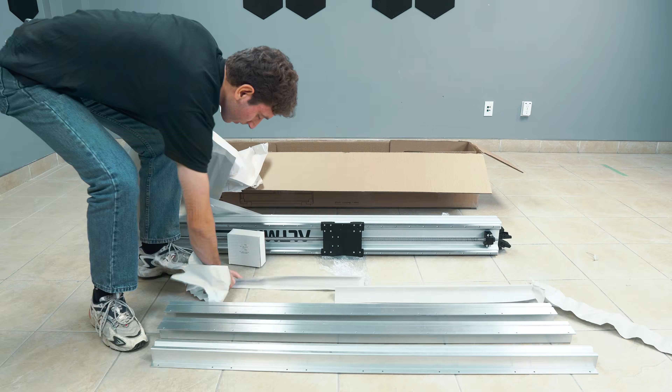Behind me is the AltMill, and I'm going to be walking you guys through the assembly process and giving you a couple tips and tricks along the way. Let's get to it.

Before we get started assembling, I want to talk you through some best practices. Due to the weight of several components, it is highly recommended that you assemble the AltMill with another person. The expected assembly time is between 5 and 8 hours. So make sure to allot ample time and pace yourself to avoid any errors, damages, or injury during the process.

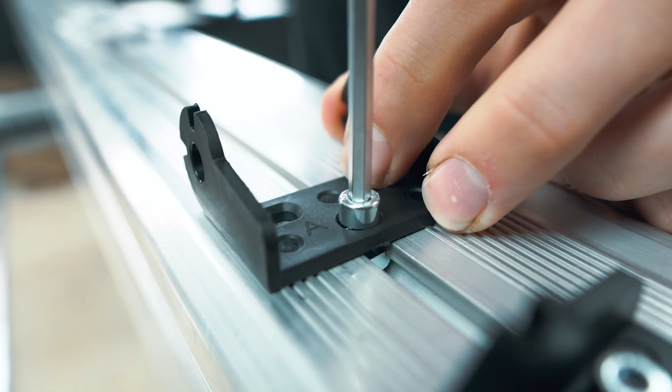Before tightening any fasteners, take note of whether they should be firmly or loosely secured. Some steps require that screws be intentionally left loose so that components can be aligned in later steps. It is recommended that fasteners be left in their respective bag until needed.

If at any point you think you are missing any fasteners or components, you can check the unboxing section of the AltMill resources page on our website, where there is a detailed list of everything included in the package. Additionally, due to us constantly innovating and improving our products, it's possible that parts of this video become slightly out of date. For your best assembling experience and to ensure you're receiving the most up-to-date instructions, please use this video alongside the AltMill resources page on our website.

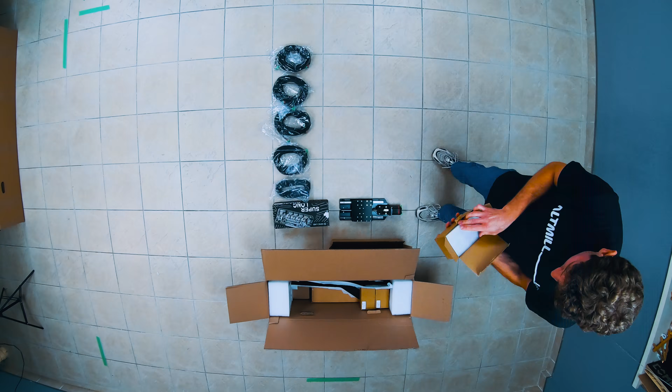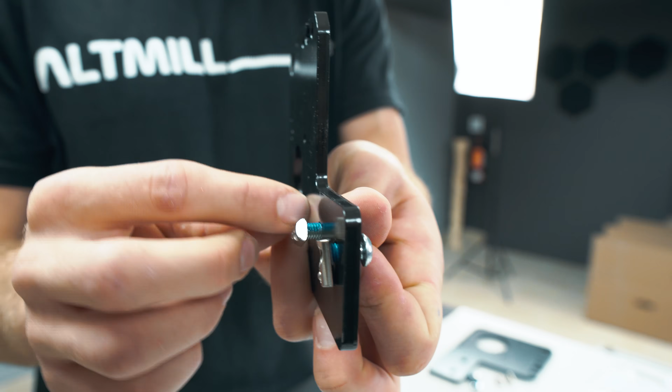We're going to be using the 4mm hex drive to install the M6x12 button head cap screws into the M6 roll-in T-nuts through these two slotted holes of the Y-axis end plate. Remember to thread the M6 into the flat face of the T-nut and leave it loose so you can slide the end plate onto the crossbeam.

Keep in mind the orientation of the Y-axis end plates while installing the fasteners, as once you install them, there will be a right hand and a left hand side.

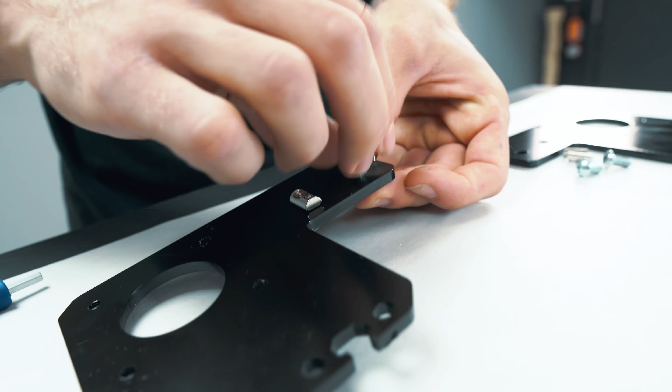These are the left and right Y rails and the 5 cross beams. Something to keep in mind when you're laying it out is look for the large bearing block and put that to the back. The motor is going to mount on the back of the machine.

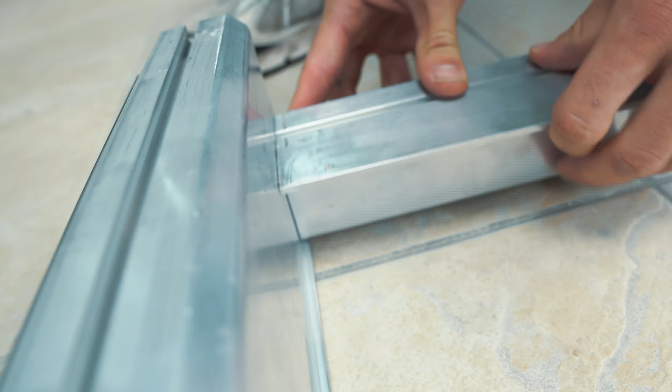Also, something to note is the orientation of the cross beams. With the cross beams, you're going to want to make sure that this flange is pointing inward on the back and the front. The other 3 can have the flange either direction, but we recommend that you put the first 4 in the same direction and the last pointing inward.

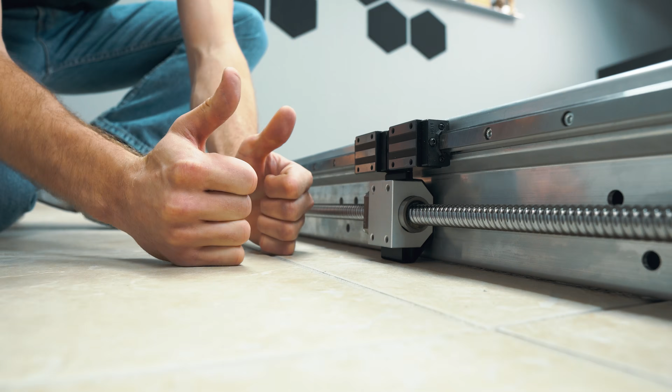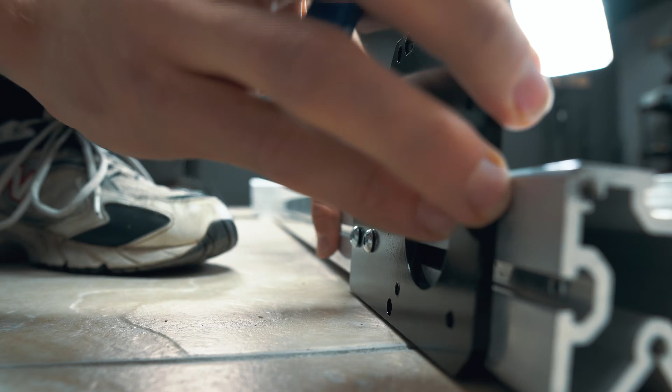When installing the cross beams, make sure not to remove this 3D printed foot, or else the Y rail will fall over like this. Tighten these up only so they're snug. You can leave one loose, only tighten one. You're going to be sliding it later on.

We're going to be using the M5x16mm cap screws, screwing into the top holes. We're going to screw all the cross beams in with the top holes on the one side, move to the other side, do the same thing, flip the tabletop. Then we're going to move on to installing all the bottom row as well.

Something to keep in mind is the bearing blocks on the front and the back will block one of the upper holes. So you're not going to be able to install a screw on those. On the front and the back crossbeam, there's only going to be 2 screws installed.

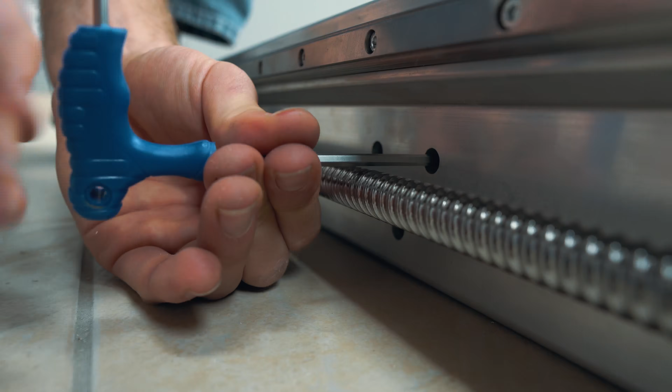I like to stick the screw first through the Y-axis rail and then bring the crossbeam into mesh. While installing the screws, make sure the bottom of the crossbeam is contacting the reference lip on the Y rail. Only tighten these screws snug for now.

When you're doing the second side, be sure to leave them loose so you have room while you're installing the screws on each of the cross beams. At first, only install one screw in a cross beam at a time while you're working on the second side to help you with alignment. Then go back and install the remaining screws into the upper row, making sure all fasteners are snug.

We're now at the section where we're going to be flipping the tabletop over. It's not recommended to flip the table by yourself, so if you can find somebody to help you, that'd be the best thing to do. Luckily, I've got my friend Scott here, and we're going to be flipping the table together.

I'm holding on the ball screw, that's hilarious.

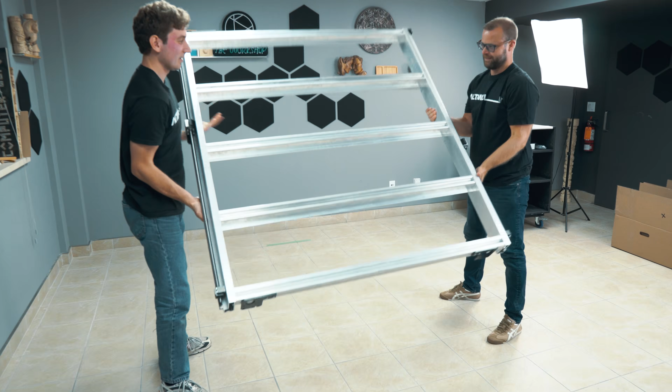When you're flipping the machine, make sure not to hold the ball screw. Now's the time to install the rest of the fasteners into the cross beams and tighten up the rest of the screws that are already inserted.

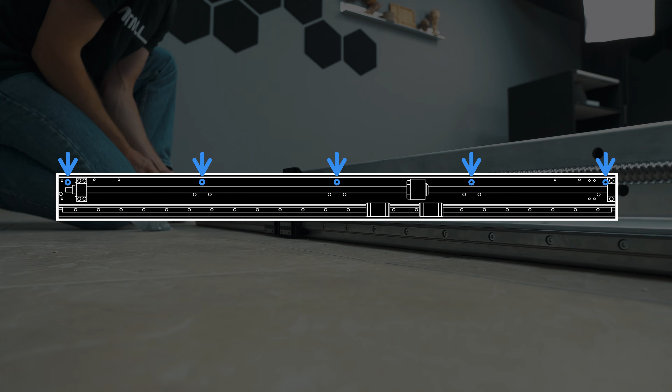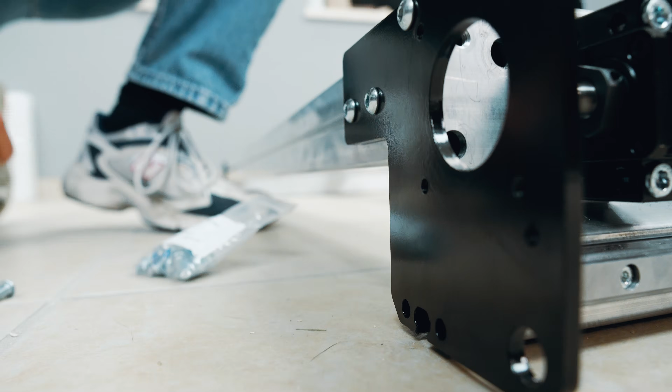Make sure not to loosen these too much so that you unscrew the bolt from the roll-in T-nut. And then slide the end cap over the Y-rail, inserting one of the M6 by 16 millimeter button head cap screws into just the top hole. Then once you flip the machine over, in a few steps from now, we're going to insert the other two. You only need to tighten these to a snug fit for now.

In this section, we're going to be putting the first two legs onto the tabletop while it's flipped over. We're going to start with putting two roll-in T-nuts into the T-slot on the crossbeam. Locating the T-nuts with the slots on your leg is a little bit tricky, so you're going to want to take some care. You can use your key to find the T-nut in there and make sure you've got it in the right place. Before you put a screw on the first one, make sure both T-nuts are located.

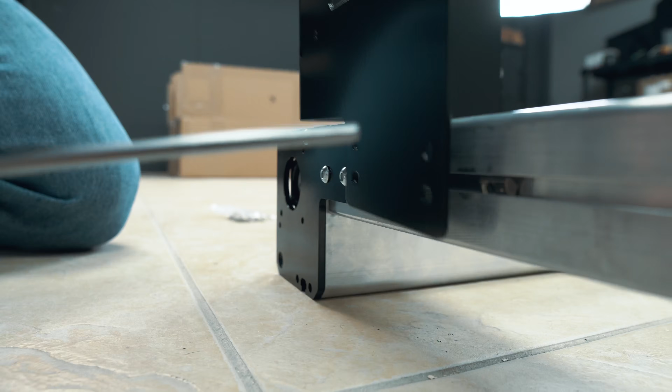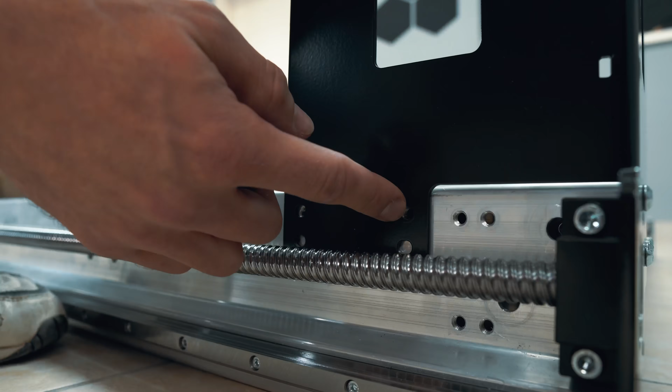I'm going to use two M6 by 12 millimeter long button head cap screws with a washer to fasten the table legs to the side of the crossbeam. Now the washers are in the part 2 bag of fasteners, so make sure to find them in there. Don't tighten those screws all the way in just yet. Wait until you've fastened the leg to the Y-rail before you tighten the screws into the crossbeam. You can note that you use the bottom slots for the Y-rail and the upper slots for the crossbeam.

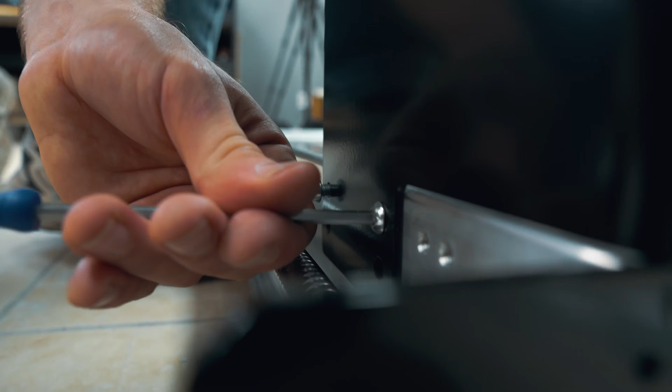Now you're going to want to put a foot on each of the legs. You're only going to take one nut off and leave this one on. Leave it loose so that you can adjust the level later on.

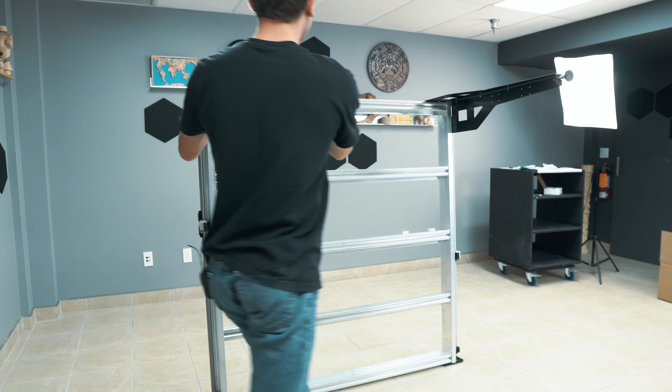So now we've flipped the table and we're going to be installing the second two legs. For this section, you're going to want to prop the table up using a mid-sized bar stool like this one, or a step ladder or stool. If your stool isn't the correct height, you can always use these packaging cushions to prop it up so that you have enough room to attach the legs. Before installing the legs, make sure to put the feet on.

Oh yeah, Scott's on fire. He's a menace to society.

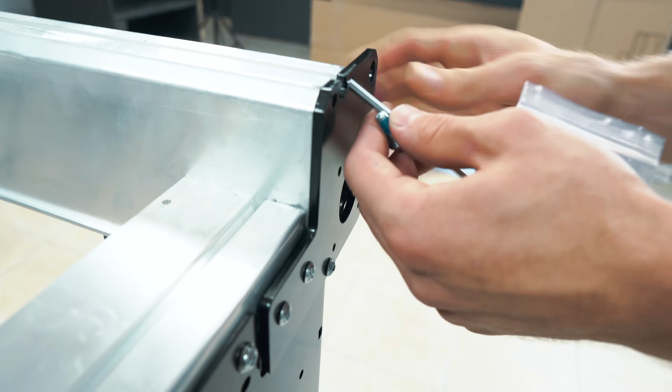Once you've got the legs attached, you can put the M6 by 16 millimeter button head cap screws into the last two holes of the Y-axis end plate. Loosen that off a touch so you can move them around.

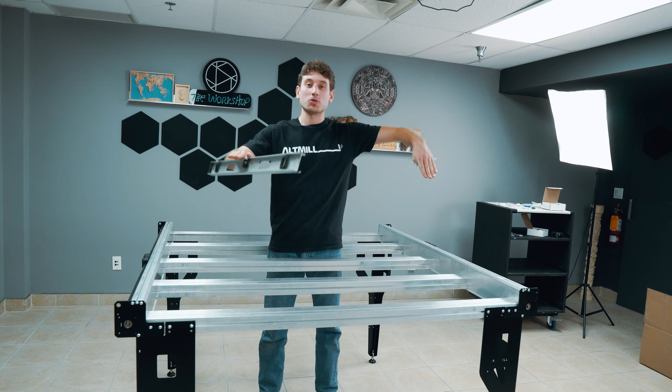Now we've got all 4 legs on the machine, and we need to make sure the tabletop is as close to level as we can make it. So you're going to want to check the front, both sides, and the back. Now, the main intention of getting this level is to make sure there's no skew in the machine between the 2 Y rails, which can possibly cause issues later on while attempting to make a flat surface of your wasteboard. There it is, it's level.

We're going to install these bump stops onto the Y-axis end plates on the inside. The screws we're going to use are the M5 by 16 millimeter long. Here are the 2 gantry plates. The left side has a hole for the stepper motor to go through.

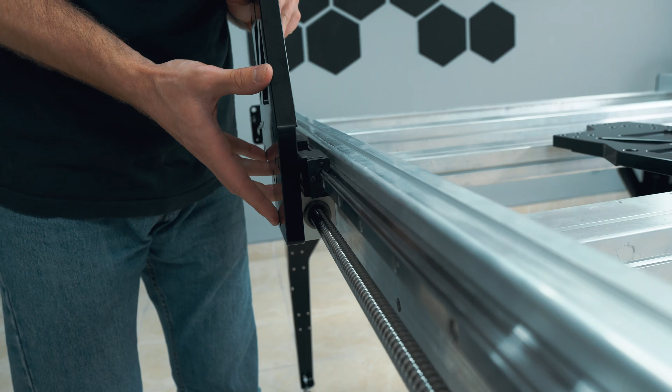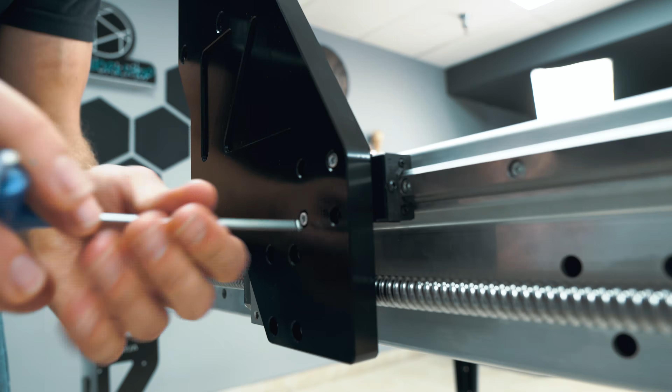We're going to be using M4 by 16 millimeter long socket head cap screws to attach the X gantry plate to these linear guide blocks. Also note that we're going to be using the 3 millimeter hex key. Leave the first one a little loose. The second screw goes into the second linear guide block. Once you've inserted all the screws, don't tighten all the way, just tighten to snug.

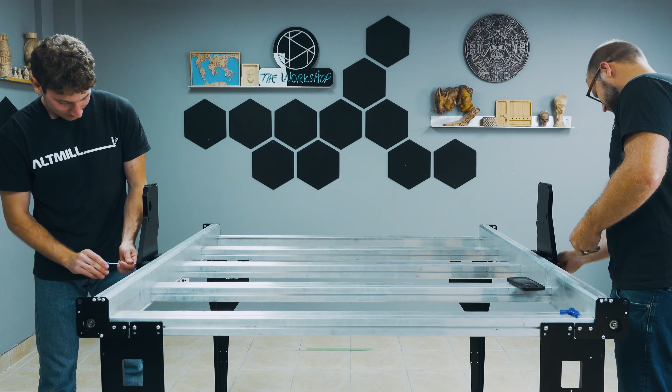Slide the loose assembly over the linear ball screw nut. Use the M5 by 16 millimeter long socket head cap screws to fasten the gantry plate to the aluminum block. Loosely tighten the screws into the aluminum block. We'll tighten those later on. You can push the X gantry plates up to the end stops.

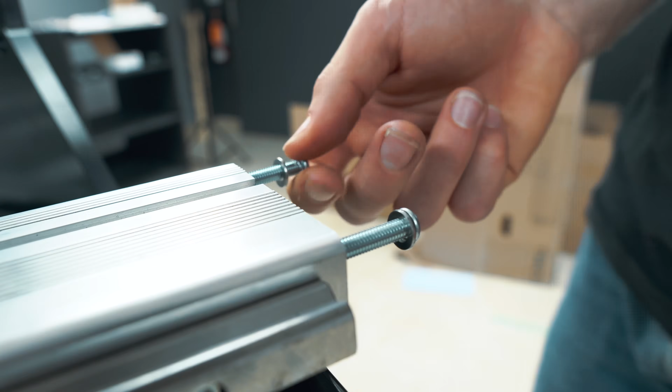Now install the remaining 2 fasteners loosely, I might add. Loose. Tighten to snug. Tighten to snug. You need to insert 4 35 millimeter long button head cap screws, M6s, into the top section of the X rail. Make sure that there's a washer on. Do not insert all the way.

Now it's time to put the X rail onto the X gantry plates, and it's a little bit heavy, so if you don't think you can do it by yourself, ask a friend.

You think you can do it yourself? I think I need a friend. I've always wanted to have a friend. You need to get a friend like Scott.

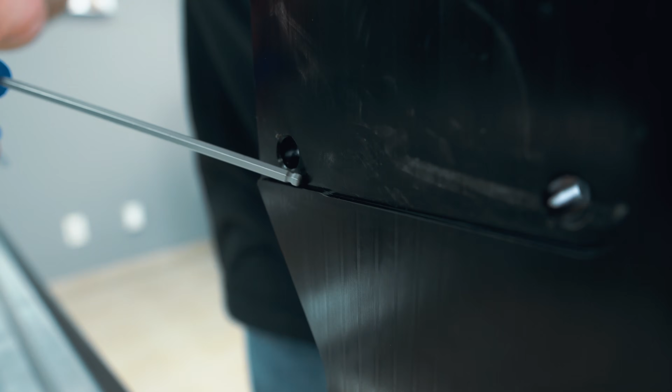Start with the front slot of the gantry plate and then rotate in until the second one sits into its seat. There is a reference edge on the right side gantry plate that the rail sits against. You can make sure that it's sitting against that reference edge. Install the remaining fasteners into the bottom of the rail. Do not install fully. Leave these fasteners loose. You can snug up the top fasteners as well.

On the left side, that's the side with the hole for the stepper motor. You're going to want to use a ratcheting clamp, or a clamp of some sort, to make sure that the rail is pressed against the reference edge of the gantry plate. At this point, we can begin tightening the screws into the X rail. Now that you've finished tightening the screws into the X rail, you can finish tightening up all the rest of the fasteners on the gantry plate.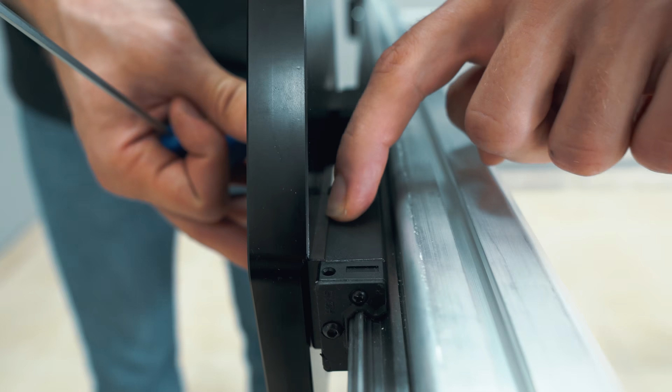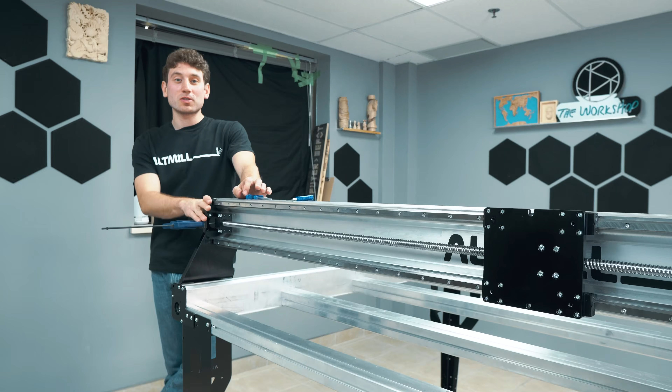Start with the linear guide blocks. Make sure that the reference lip of the gantry plate is against the reference edge of the guide blocks. Finish up by tightening the remaining 4 screws into the aluminum block. Once all the fasteners are tightened up, you can remove the clamp, and now you've got your X gantry assembled.

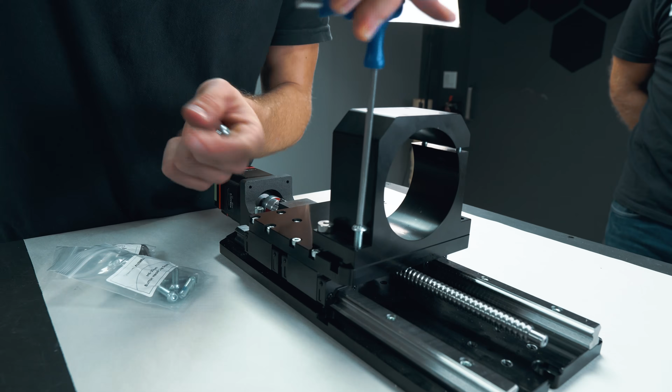We're going to install the spindle mount onto the Z gantry assembly. Start with the shoulder screws. Now on the bottom, you're not going to be able to put that shoulder screw in there. The shoulder screws go to the top. Tighten the side with the slot first. After you've tightened the shoulder screws, you can insert and tighten the M6 by 25 millimeter long button head cap screws.

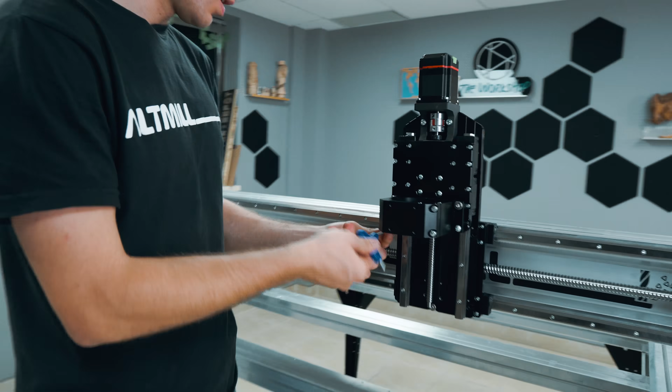Using 2 M5 by 10 millimeter long socket head cap screws, attach the drag chain bracket into the back of the Z gantry assembly. Tighten the shoulder bolt into the seat. Snug. Do not tighten this bolt all the way. Tighten that up. With the M6 by 16 millimeter long button head cap screws, we're going to fasten the Z carriage plate against the X gantry plate. And you can tighten these right up.

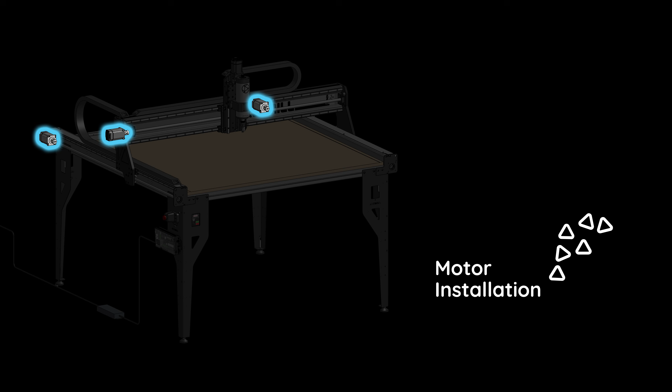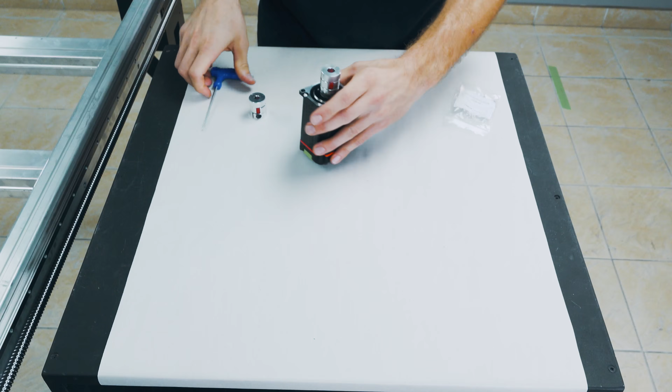We're going to be installing the 3 couplers onto the 3 different stepper motors. Now, if you notice, the couplers have a larger and a smaller diameter. Make sure that you use the smaller diameter side to go over the motor shaft. It's going to be snug. One thing to note is when you're putting the coupler onto the motor shaft, bottom out the coupler until it reaches the plastic, until you can't push it on any further. Then tighten it up. Do that for all 3 motors.

On the motors, confirm that the dip switches are in the correct position. These positions can be found on the Sienci Labs website in the Altmill resources for installation, motors. The correct positions for the dip switches are 1, 2, 3 down, 4, 5 up. The dip switch positions are the same for all 3 motors, X and the 2 Ys.

One thing to note for the Z motor is that the dip switch orientation for number 3 is up. 1, 2 down, 3, 4, 5 up. The dip switches should come to you in these orientations, but it's good to double check. When installing the motor, make sure to put it in this orientation. You'll note the power and the controls.

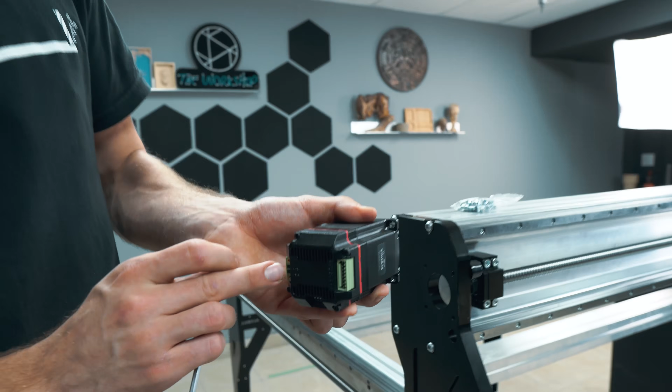Can't find the shaft. Okay.

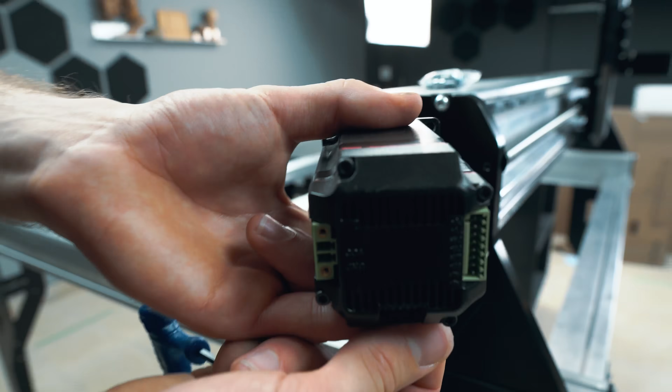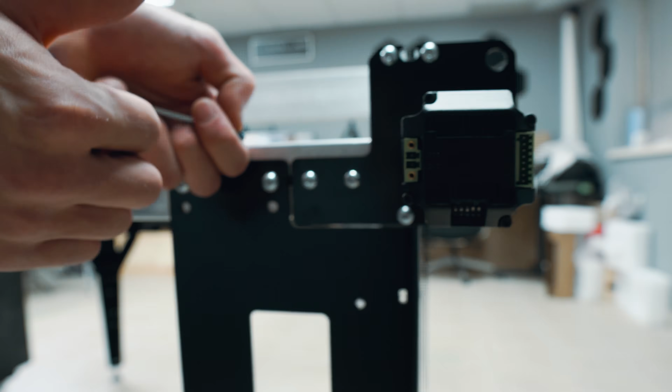To install the motors, use the M5 by 10 millimeter long socket head cap screws. Using the 3 millimeter drive, tighten the coupler onto the ball screw shaft. We're going to install the second 2 motors on the back of the machine on each side for the Y drives. And keep in mind that same orientation. You've got the power to the left and the communication controls to the right. Tighten these screws right up. And with the 3 millimeter drive, tighten this coupler.

These 4 lengths are going to make up the 2 drag chains. We're going to prepare them for later by taking off the 4 end links. First, let's cut them open.

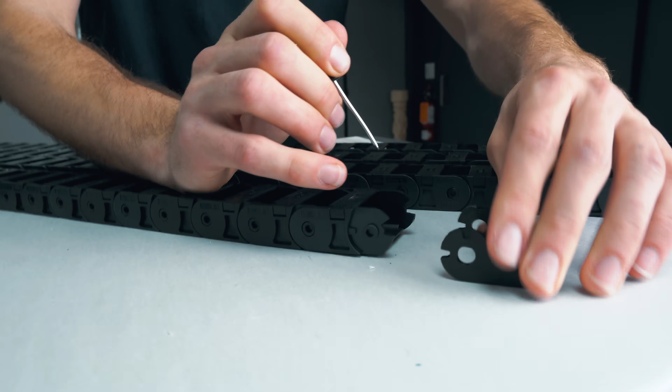There's 2 types of drag chain ends to note. One that has a knob and one that has a hole. The end that has a hole is the end that's going to be used on the dust shield and fastened to the dust shield. Make sure that you have one of each type of connector per drag chain.

At this step, we're going to be installing the dust shields. We're going to start on the left-hand side, and that's the side that the drag chain is going to be on. So we're going to install this small clip onto the very front of it. We're going to use M5s and T-nuts to fasten the dust shield into the Y-rail. While installing the dust shields, be sure to note the orientation of this notched cutout. Have the notch facing to the inside of the table.

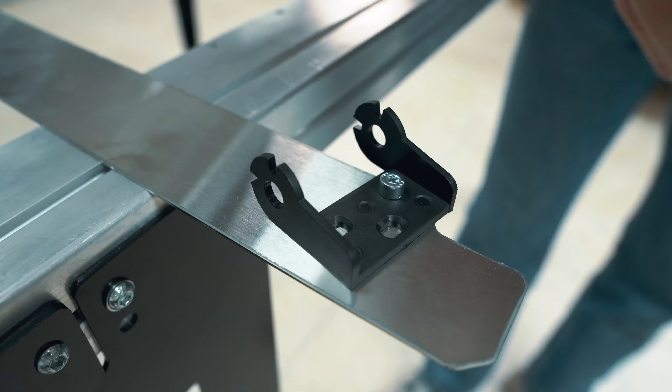While installing the clip, we're going to use an M5 socket head cap screw by 10 millimeter long. For all the other fasteners on the dust shield, we're going to be using button head cap screws by 8 millimeters long. This is the only one that's different. While installing the T-nut, pay special attention to the orientation. That is to have the angles on the bottom.

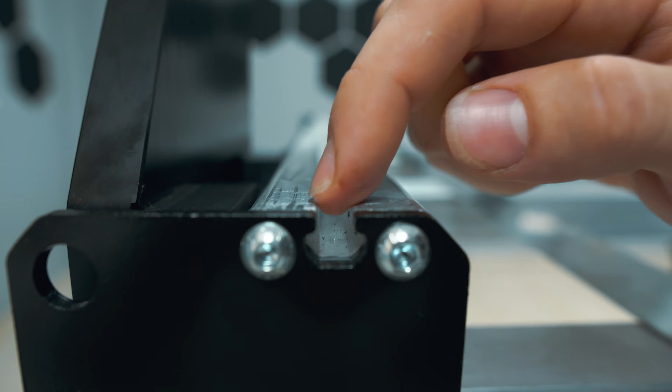While installing the T-nut onto the M5, leave it loose to be able to slide through the T-slot of the Y-rail. After the clip is installed, install M5 by 8 millimeter long button head cap screws into the T-nuts for the remaining 3 holes in the dust shield. Then do the same for the other dust shield, the right side.

So helpful having Scott here.

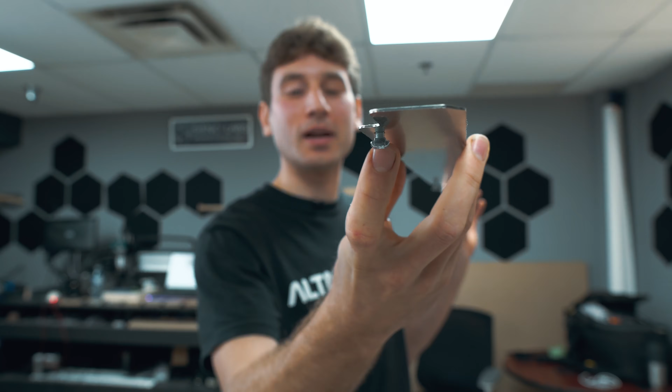Do your best to align the T-nuts with the length of the dust shield to make it easier while you're sliding the dust shield into the T-slot. Insert the dust shield so it comes to the end of the Y rail. Fully tighten all hardware fastening the dust shields to the Y rail.

To make a drag chain, you're going to need to connect the two lengths. You do it by clicking them together.

Got the outtakes on this.

I'm gonna be releasing. The recommended number of links on the drag chain for the y-axis is 50 links, and the recommended number of links on the x-axis is 47. Now when I say links, I mean you can count these top tabs. Don't include the end clips. 2, 4, 6, 48, 50.

Yeah. 50. Once you've counted the length of one drag chain, you can use that number to figure out the second. In this case, we know that this drag chain is 50 links long, and the second drag chain we need to be 47.

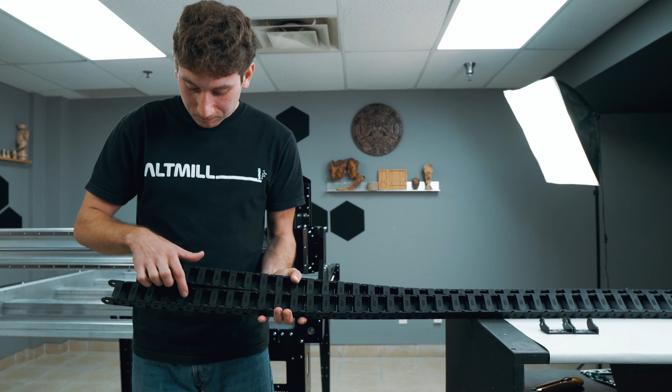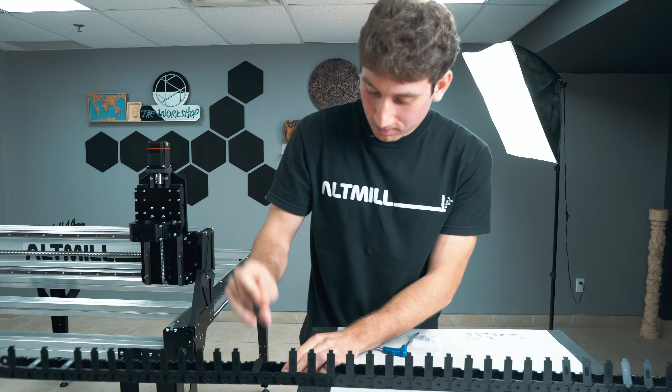You need to prepare the drag chains by unclipping all the clips along the length of them so that you can easily put the wires into the drag chain. Now that you've gone through the annoying process of unclipping all these clips, if you'd like, you can remove every second one to reduce the amount of time it takes to unclip and reclip your drag chain if you ever need to remove a cable.

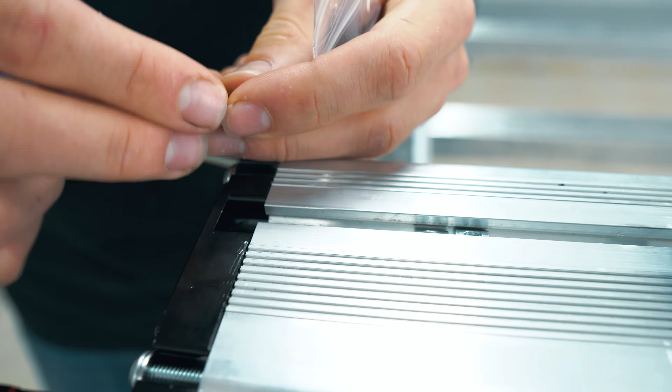We're going to install the second end of the Y drag chain to the top of the X rail, right here, using the T-nuts and the M5 by 10 millimeter long socket head cap screws. Drop the T-nut in the pocket and slide it along. We need 3 T-nuts put into the X rail to install the ends of the Y and X drag chain.

By eye, try to align the 2 links with each other. Next, use the end link with a hole on the end, and using the middle hole, fasten it onto the X rail. Leave it a little loose for now.

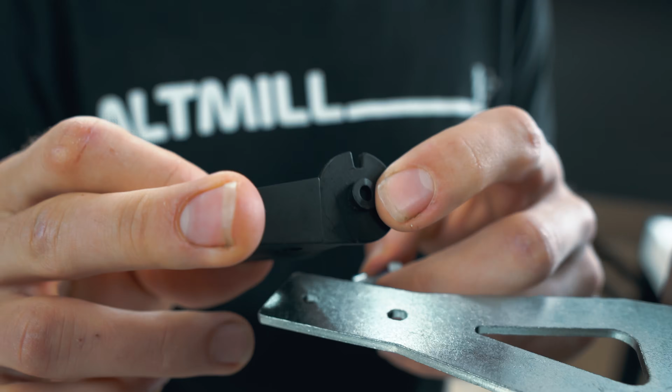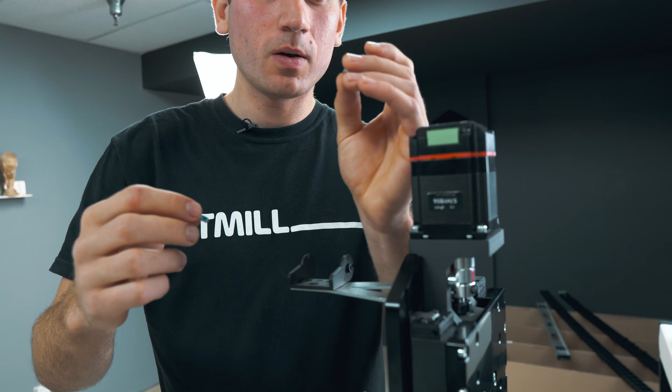Using the last end link that has the knobs on the side, place it on top of the drag chain bracket of the Z carriage plate. And you're gonna use 2 fasteners, also using a nut. Be sure to note the orientation of the end link where the knobs are facing that direction. The drag chain is gonna wrap up, come around like this.

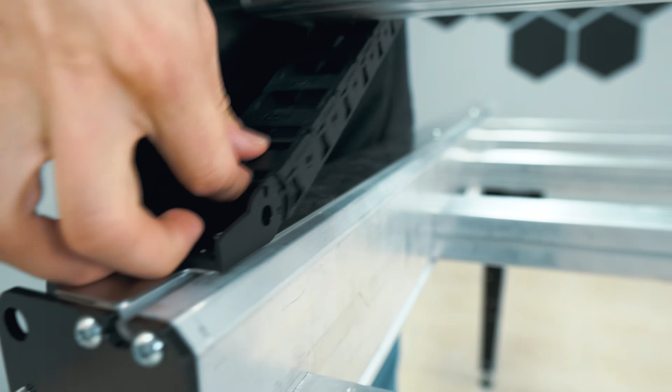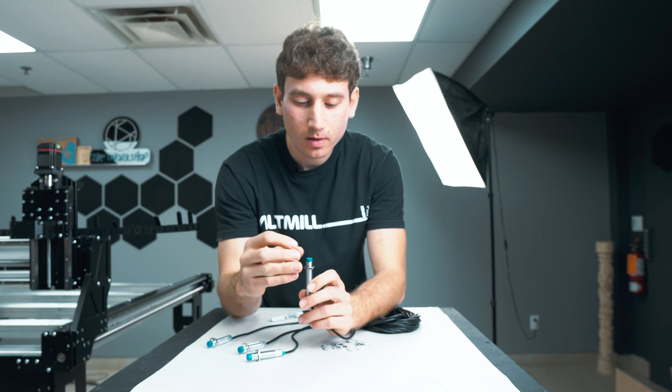Moving on to wiring, start with your bag of 4 sensors. Start with just one nut. And as a small guideline, take another nut and bring the first one down until the length of the flat to flat is about the top. Just like that. Do that for all 4 sensors, and then insert the lock washer on top as well for each.

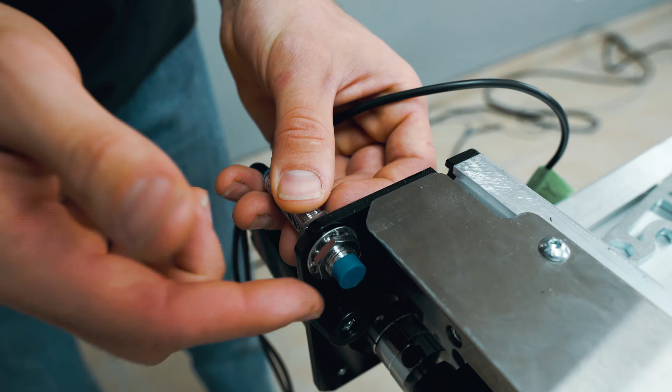Using some tape, label the ends of each of the axes. At this point, it doesn't matter which one you choose. X, Z, Y1, Y2. The left side of the machine that has the X motor on it as well is the Y1 side of the machine. Adjust how far the sensor sticks out from the end plate until it reaches almost the distance that the stop is. You can use the included wrench to show. Note that the sensor cannot stick out past the rubber stop.

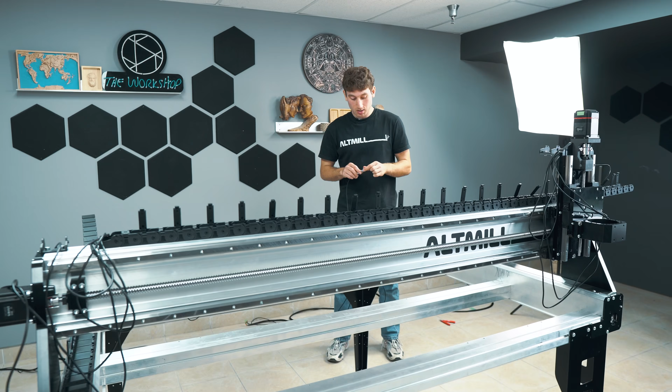The Y2 sensor goes on the right side of the machine at the back near the motor. The Z sensor goes in through the back of the carriage plate and cannot stick out past the distance of this pocket. The X sensor gets inserted into the gantry plate that the motor is also connected to. Use the wrench to make sure that the sensor is sticking out the correct amount.

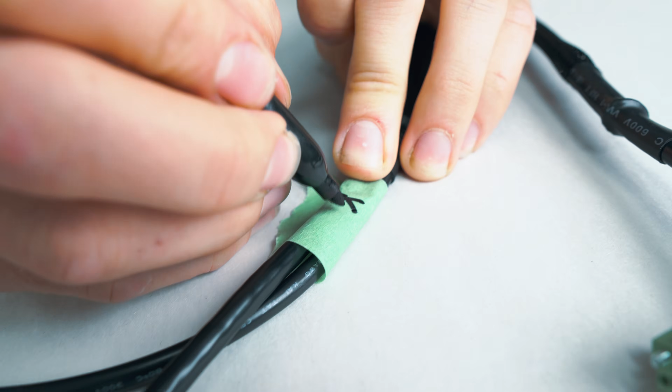Moving on to the motor cables. This is the side that gets connected to the motor, and this is the side that gets connected to the controller. On the controller side, using a piece of tape, mark where you have used the cable. For this, I'm going to write down Y1. Use a small screwdriver to tighten the cable going into the motor power. Do the same thing attaching the cables into each of the motors, and label the controller side with a piece of tape so you know which motor it's connected to.

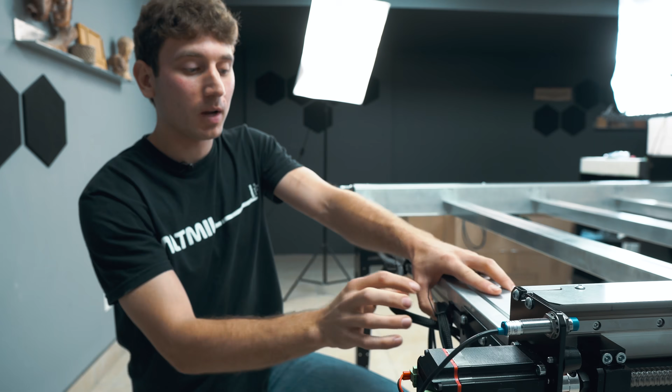In this bag you'll find motor harness clips and various sizing zip ties to neatly attach the wires to the machine. No need to go too tight on those. Bring the cables from the Y1 motor along and attach it using a zip tie through this cable mount. Using a second zip tie, loop it through the bottom of the cable mount and put the cables from the Y2 motor through on the bottom. So you're going to have two sets of cables on this motor mount nearest the Y1 side.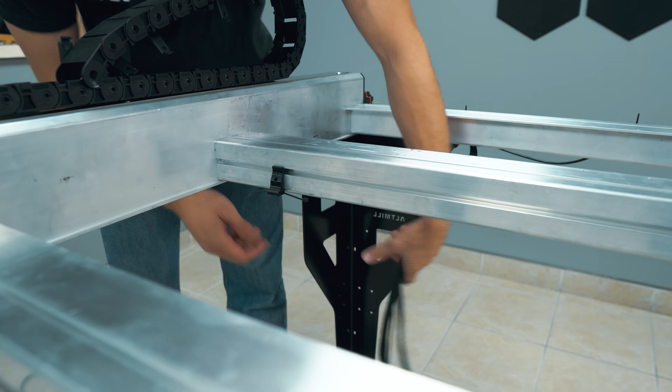Put a cable clip near the Y rail on each of the cross beams. Using zip ties in the bottom slot on the cable hanger, insert the zip tie through, group the set of 4 wires, and for now, you can leave the zip tie a little loose.

If you purchase the Sienci Labs spindle kit, take out the VFD and attach it to the VFD mounting bracket. The face that you're going to attach to is the one with the cutouts. The L that sticks out is on the left side when you're looking at it. You're going to attach it using the M5 lock nuts and M5 by 16 millimeter long socket head cap screws.

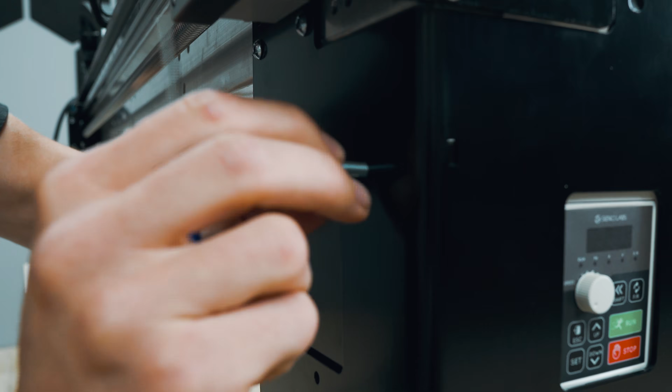Using 2 M5 by 16 millimeter long socket head cap screws, attach the VFD and bracket to the inside of the leg. Align it with this pocket, and you're going to screw in from this side. 1 and 2. Bring the spindle cable around the back side of the leg and wrap it around. Bring it around the back and over top the X rail and towards the Y gantry assembly.

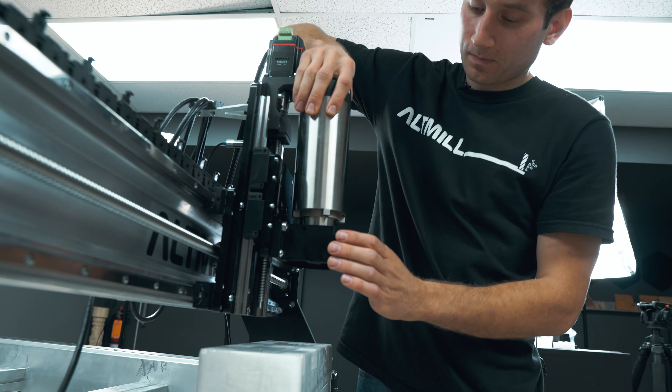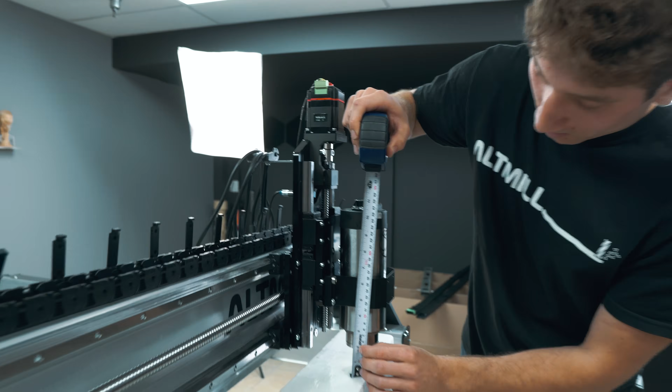Place the styrofoam box underneath the spindle mount so you can rest the spindle while inserting it. Make sure the screws for the spindle mount are loosened fully so it is not clamped. You're going to need to use a tape measure for this step. Confirm that the spindle is sticking out the bottom of the mount by about 4.5 inches. It should work out that way if you rest it against the spindle box. Tighten the bracket screws and go back and forth between the 2 screws while tightening to ensure even clamping.

Be sure to match the teeth with the slots on the spindle for the spindle cable when inserting it. Tighten it down by hand. Group all the cables from the Y assembly and begin fitting them into the drag chain. Reclip some of the clips on the drag chain to hold the cables as needed. Be sure to leave a fair amount of slack on the spindle cable so that it's able to reach the lower limit of the travel for the Z-axis.

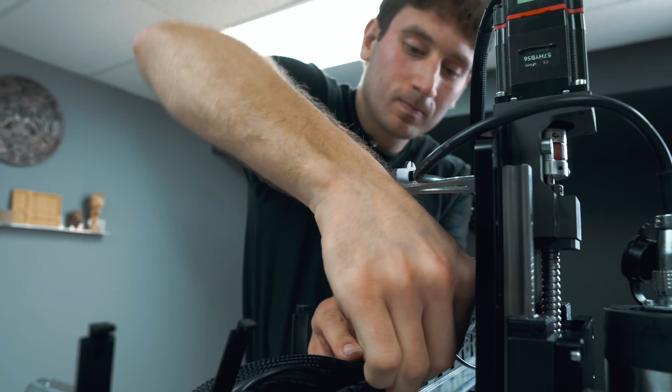It's time to tighten these down. Remember to grab the cables from the X-axis as well. Group them together with the Z. Fit them through this end link, and then bring your drag chain up and clip that first one together so they all fit in.

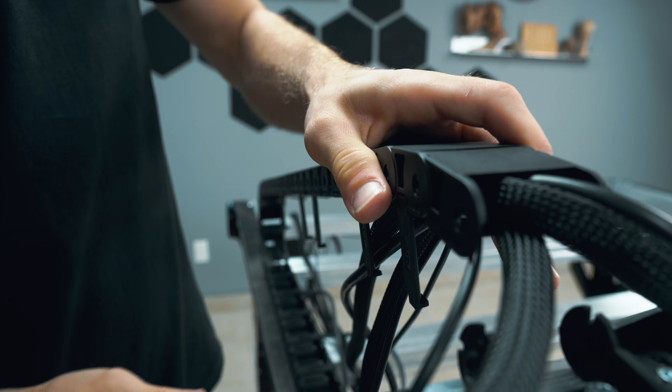With patience, come along and fit all these cables into the drag chain, occasionally clipping a clip up to make sure they stay in place. Throw these clips all the way back so they stay in place and stay out of your way, makes it a bit easier. That clip right in the center of that pocket there is a good one to clip down.

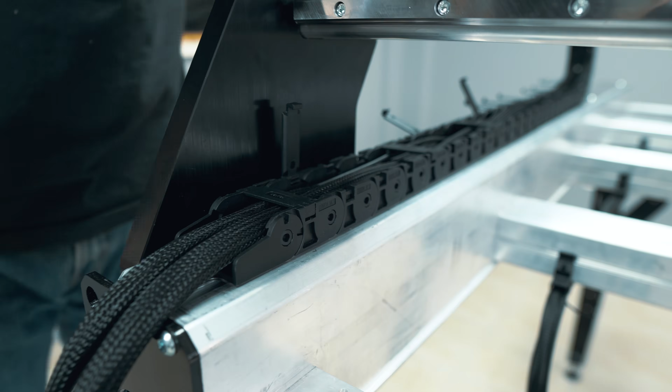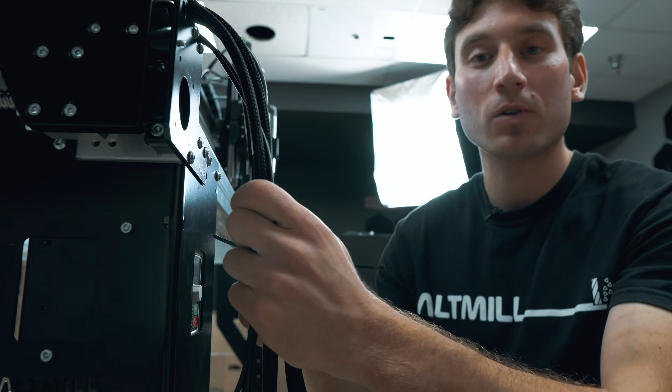Now you can close all the clips on the drag chain. Take the bundle of wires and loop them together using a zip tie.

If you didn't buy the spindle kit, then you'll be installing the e-stop using this plate that fits in the pocket of the leg. You fit the M5 Nylock nuts into the back of the plate. To secure the e-stop, use M5 by 16 millimeter long socket head cap screws.

If you did buy the spindle kit, then you'll be mounting the e-stop to the mounting bracket of the VFD. There are two threaded holes that you're going to screw the M5 by 16 millimeter long socket head cap screws into.

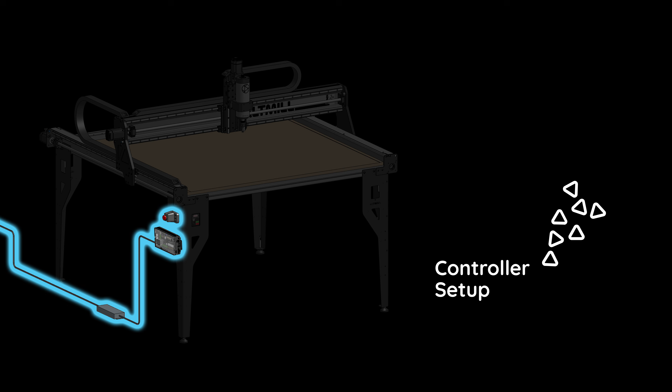This here is the SLB control board. It's going to be mounted to the side leg just underneath the e-stop. And you're going to come in from behind the leg with two M5 by 10 millimeter long socket head cap screws to fasten it. Take the cover off by loosening the thumb screw, sliding, and rotating out.

Looking at the inside of the SLB, the white ports are for the sensors, the black for the motor controls, and the green ports for the motor power. The motor power cables can be connected to any of the four inline green ports. But take extra care to ensure the sensor and motor control cables are connected correctly to the respectively labeled white and black ports.

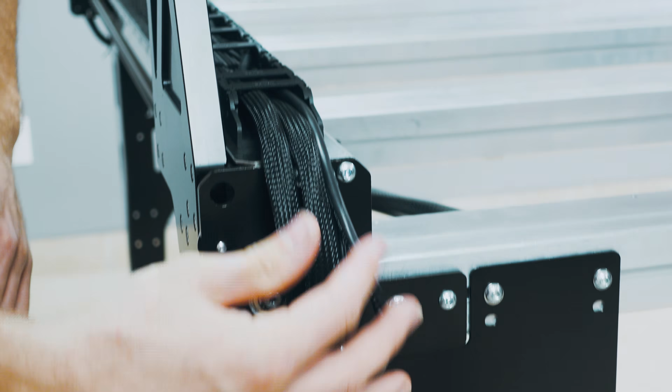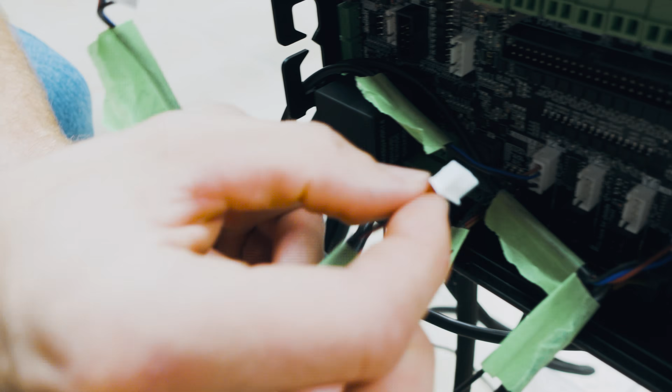You're going to want to clean up the remaining cable slack by using the zip ties and also using the cable clips that are already there. So for the Y cables, we recommend looping them back and forth in the same position where they're already coming from, and taking extra care because the Y2 cables are a little bit longer than the Y1.

Scott, can you hold these? What do I look like? A nice guy. Clearly wrong.

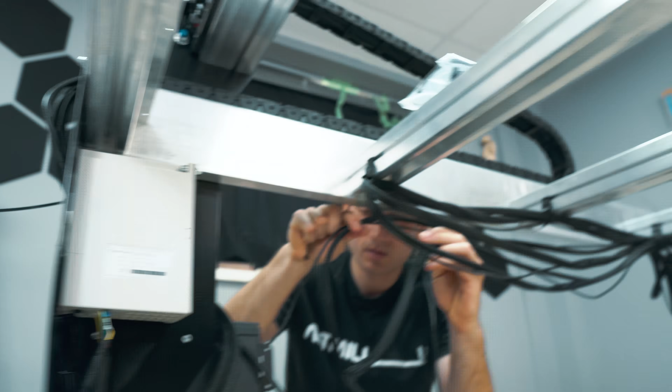For the X and Z cables, we recommend grouping the excess slack together behind this leg. Plug the e-stop cable in. This side goes into the e-stop button and this side into the controller. If you purchased the AutoZero touch plate, this is where you plug the cable in.

This is the power supply and it gets plugged into this side of the controller. The VFD controls cable is plugged into this port of the controller. The USB-C to USB cable that will plug into your computer is plugged in here, where it says USB. This side is plugged into your computer.

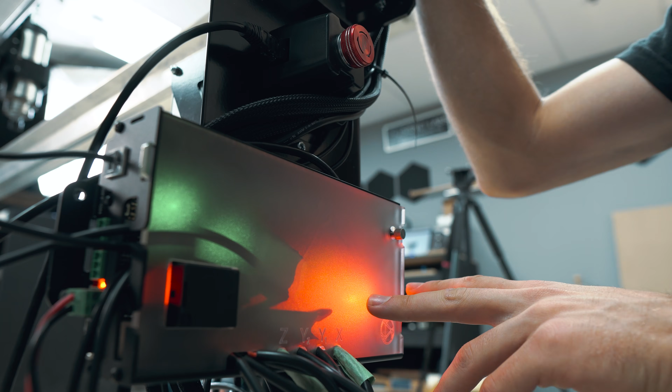Now that you've checked to make sure that everything is plugged in and wired the way you like, it's time to turn the machine on. Due to a safety feature in the control board, the power is not automatically turned on when the switch is turned on. To make the control board operational, simply press the e-stop and unlatch it. You should see two green lights and a red on this side. And once you press the e-stop and unlatch it, you'll notice a blue come on.

All right, the machine's all together. You've turned it on. Now it's time to go to the resources page and start learning how to make those first movements on your AltMill. I really enjoyed walking you guys through this process, and I hope you had a good time as well.